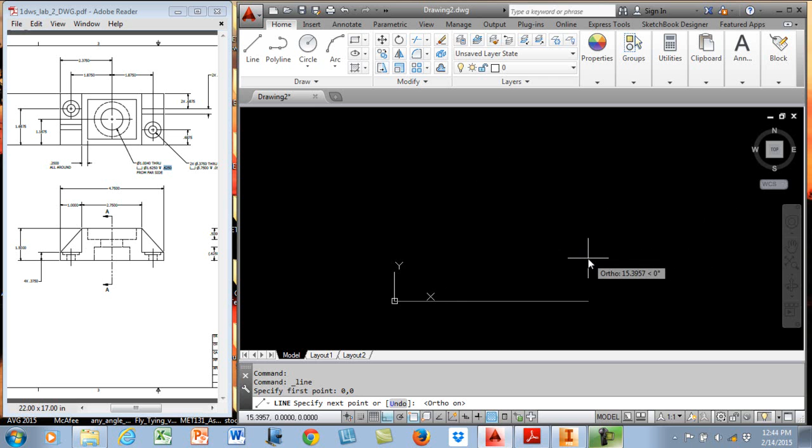And I'm going to draw one up at 0.375, which is given right here. Then I want to go over, well, I don't want to go over. I'm going to stop that, and I'm going to draw another line from, let me change my settings. I don't need quadrant and I don't need perpendicular, but I will go endpoint, center for now. Those are my standards, so I'll go in here and draw a line straight up, 0.375.

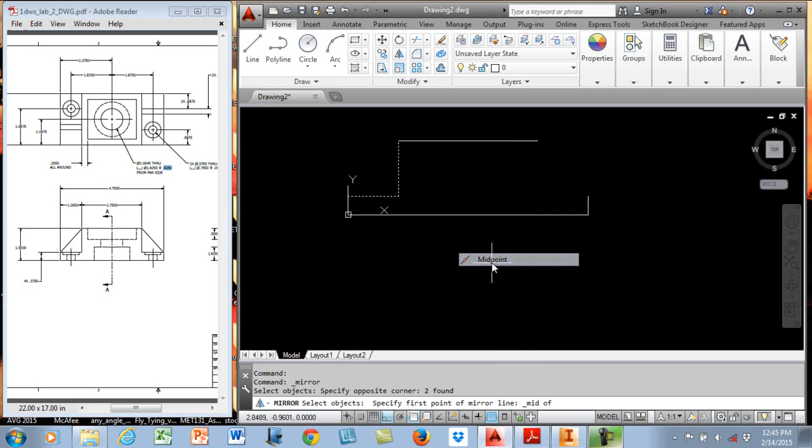Then I'm going to go over, and that wants to be 1 inch, and then I need that to go to 1, 1.5, and I need to go over 2.75, and I need to go back down. Let's see. I'm just going to mirror, the easiest way. Just mirror these two objects right here, about the midpoint here, and I've got ortho on, so I'll just click a point. Got that.

So let's look at that again. I went 4.75, which was this distance right here. I went up 3/8, which was this distance here on both sides. Then I went over and up. I said I wanted 1 in the X and 1.5 in the Y to get to this point right here. Then it said go 2.75, so since I had ortho on, all I had to do was type in that value, and it went to the right because I had it pointing to the right, and then I mirrored these two to reflect those.

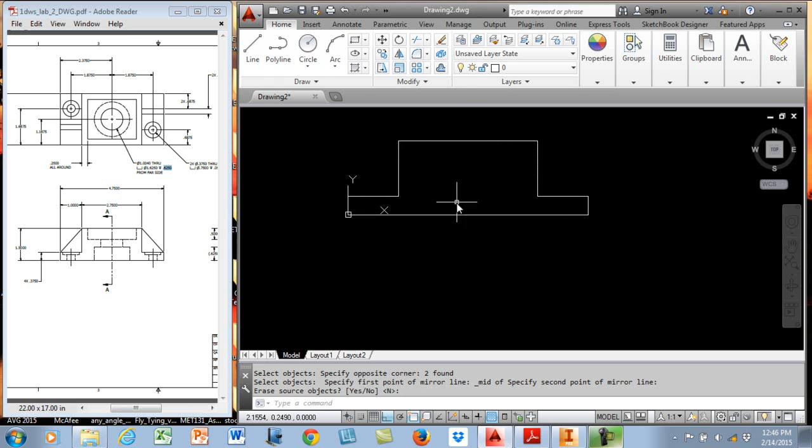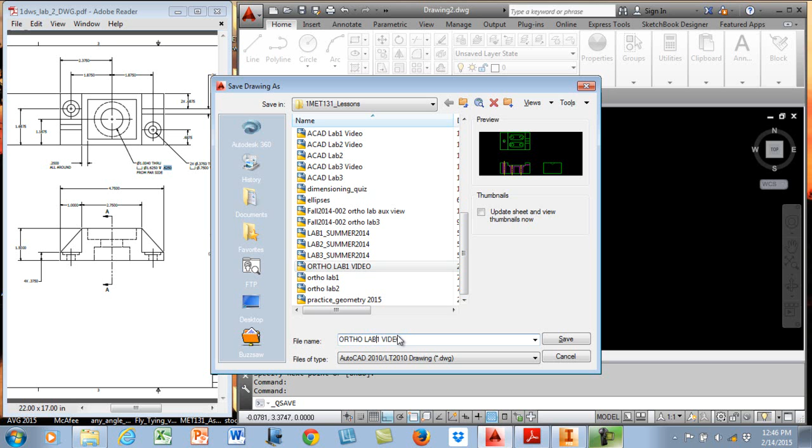And then let's go ahead and draw a line from this endpoint here to that endpoint, and from this endpoint to that endpoint, and that takes care of the two gussets. We can't draw the hidden features yet, so we'll just leave that like it is. So I need to do a save here real quick. Ortho Lab 2 video is what I want on this one. Okay, so we're done with that.

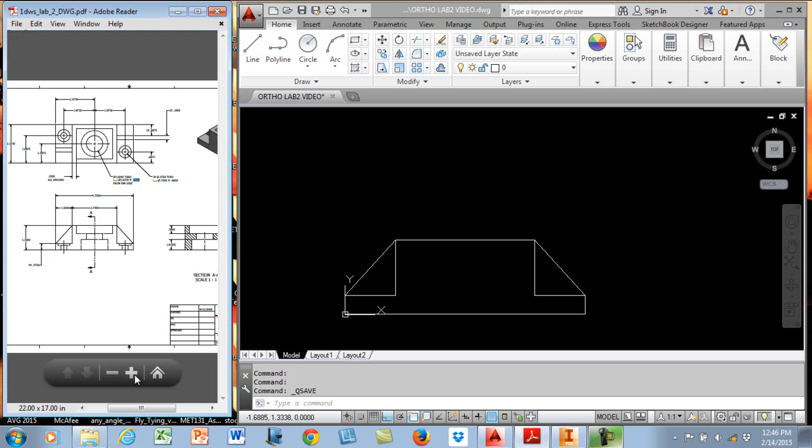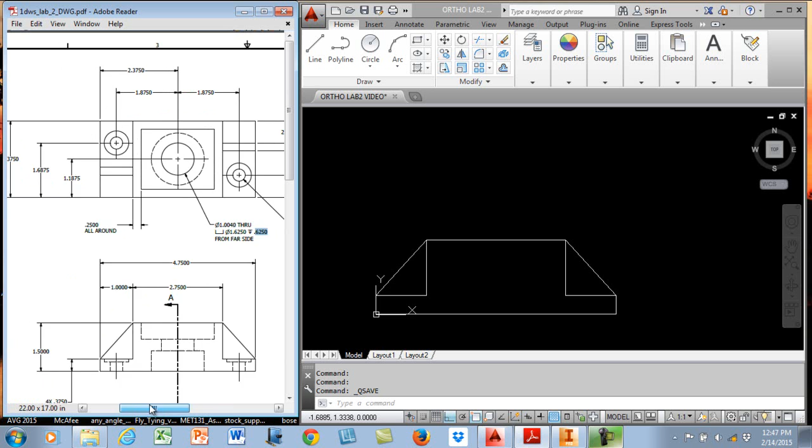So we either want to draw the top or the right side. I don't want to draw the right side yet. I'm just going to draw the top, and I need to make that a little bit smaller. If I make it too much smaller, we're not going to be able to read it. So let's make our CAD a little bit smaller. We'll make this a little bigger. Now we need to go a little bit more. See if that's enough yet. Not quite, but that'll be close enough for now. We do need to have the overall here, so we'll keep that up where we can see it. Okay, so we'll go in there and draw that now.

So again, I'm going to draw a line straight up. It doesn't much matter how long you make it. And I think this time I'm going to draw a rectangle from this, relative 4.75 wide, comma 2.375, which is that number right over here on the left. So there's my first shape of that. So we'll move that over.

Okay, now it says we need to have this box here in the middle. So I think what I'll do there is I'll draw another box. Now, the only thing about that is it does show me that I need to go over 1 inch. So I'm going to say reference from this endpoint. Let's see, I got to get my command back. Reference from the endpoint right here. Relative to that, 1, 0. Okay, there you can see it.

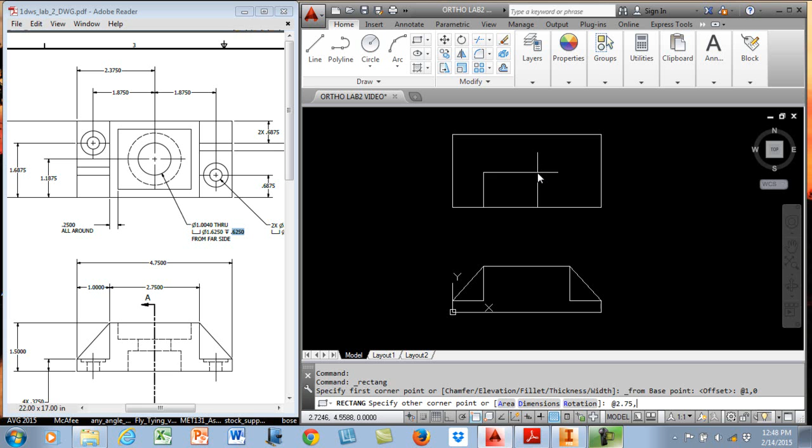Relative to that, 2.75 in the X, comma, what was this number? 2.375. Yeah, 2.375. Whoops, fat fingers. And enter. So that creates that box there.

Now, the only thing about that is I would be careful. I don't want that whole box, so I'm going to click on that and explode it. And I want to get rid of this line and that line and delete them. Okay, so you know what? Actually, I didn't want to delete that right then. I'm going to undo that, and I'm going to undo the explode. I want to keep that like that just for a minute because I need to have that offset.

So I'll offset a distance of 0.25, and I'll offset this right here inside. So that's a lot easier way to do that. Then I don't have to do any trimming. Now I'll explode this one and delete this line and that line.

Now I'm good to go there. Of course, I'd hit the save button again. I've saved, done something worth saving. Well, let's see. We can draw these two circles if you want. We could draw the 1.004.

So I'll draw a circle, and I want to go reference from the... Where do I want to go from? Well, let's see. Let's say the midpoint of this line, relative to that 0 in the X, according to the drawing, 1.1875 in the Y. And that centers that up. Then I can go to the diameter of 1.004.

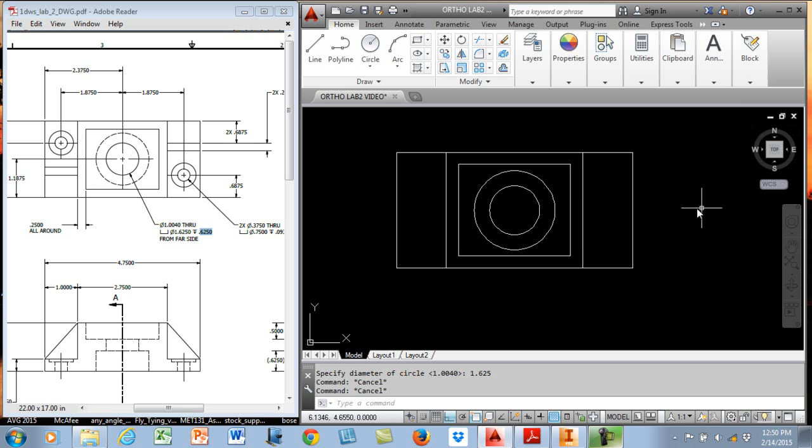Now I haven't created any of the layers yet for that, so let's make this smaller again and I can see more of my toolbars, but I don't see that here. So if I hold it there long enough, here's the one you want. It looks just like the one you see in your full screen. Layer Property Manager, I want a new layer, and I want visible.

And if we go with the colors from last time, I think we used green. We do want continuous. We want the thickness of that to be 0.7 according to the standard. And that's all we need on that one. So we'll create a new one, and we'll call it hidden. And I don't know, what did we make that? Was it magenta?

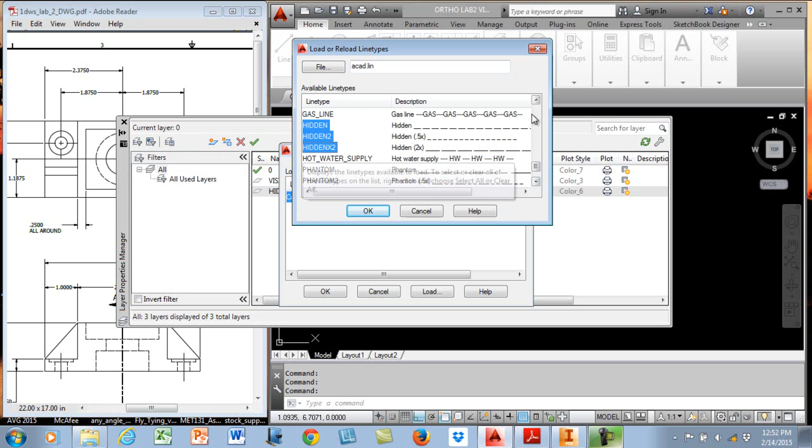We don't want continuous, so we need to load the rest of the lines here. We know we want dash, or excuse me, center line. So if we hold the control key down, we can pick multiple and skip some and get the hidden. Yeah, that'll do us. So we'll get hidden 2 on this one. We do want the line weight to be 0.5 instead of 0.7.

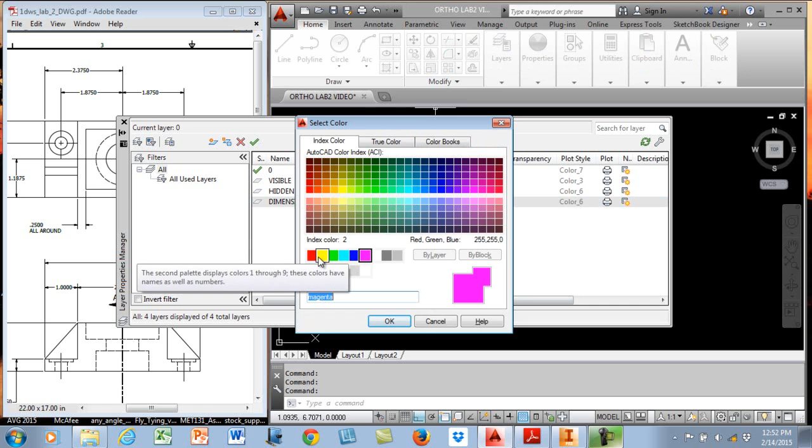We want to do another layer called dimensions. And I gotta spell it properly. And I think, what do we use on that? Let's go with yellow. Doesn't much matter. We don't want hidden. We want continuous. And the 0.5 is fine there.

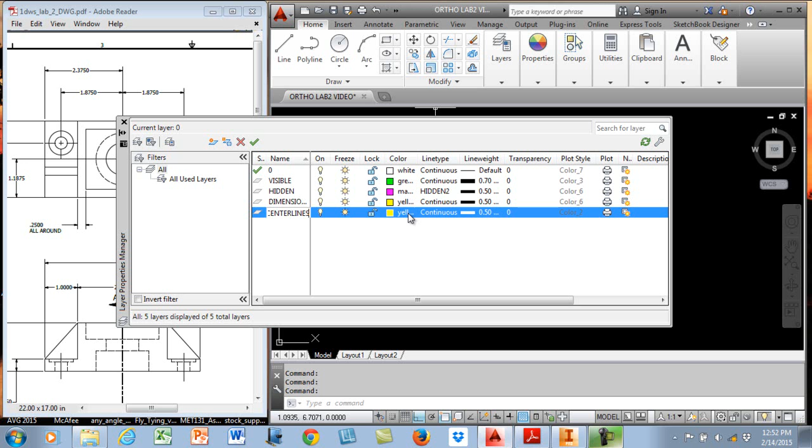That's what you want. Then on the next one, we want the center lines. We'll usually keep all those the same properties, with the exception of the continuous. We want that to be center 2. And we're done with that. Now we do want to put this on the hidden layer. Okay, so we're good there. So let's save.

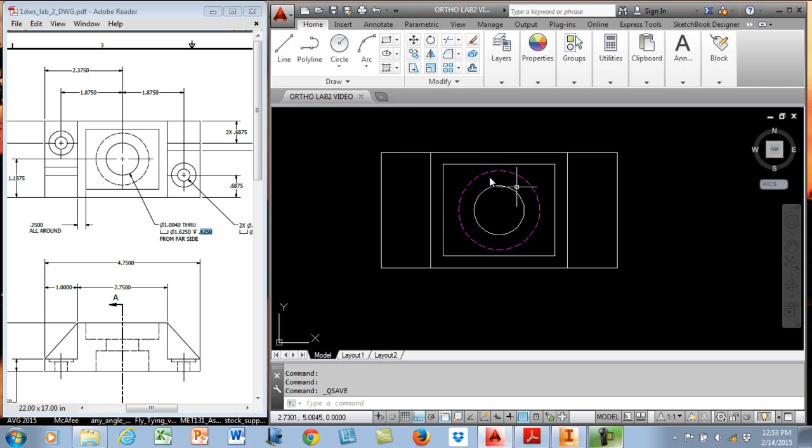Now if we want to draw these counter bores, what we want to do there is we'll draw a circle, and I need to move this over so we can see it. It looks like from this corner, actually it'd be from this midpoint, wouldn't it? We want to go up 1.6875, but first we need to go over 1.875. So we'll go in there and on our circle we'll say

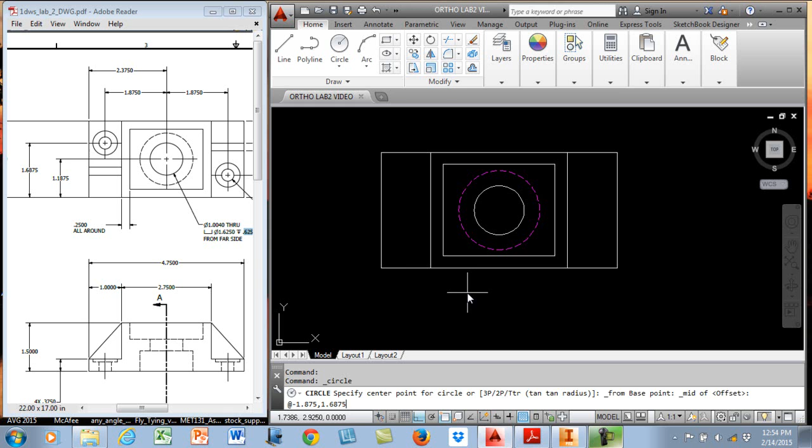at the midpoint here, whoops, sorry, I need to do reference from, sorry about that. Circle, reference from the midpoint, relative to that, minus 1.875, comma 1.6875. The diameter of one needs to be, I think it was 3/8. One of them's 3/8.

0.375. And the other one, which will snap to the center, wants to be D 0.75. Those are both solid, not hidden. Okay, and then we can also draw the rib in there, the gusset, and that's 0.6875. So let's do an offset of 0.6875.

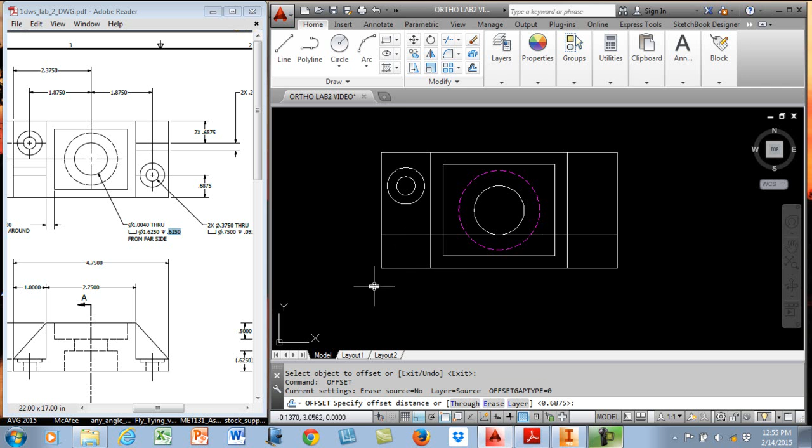This line, whoops, notice that is still one object. We need to break that up, so let's do an explode, and now they're individual. So now we'll do our 0.6875, and we'll pick this line and go up with it. We'll offset again a distance of, let's see, 0.25. 0.25, and we'll offset that line up this way, and then we'll trim to this line, both of those.

Okay, and of course we'd want to save, and then what we want to do is let's rotate that around. So let's do a polar array, all four of these objects. And the center point is at the center here. We only need two, and that's it.

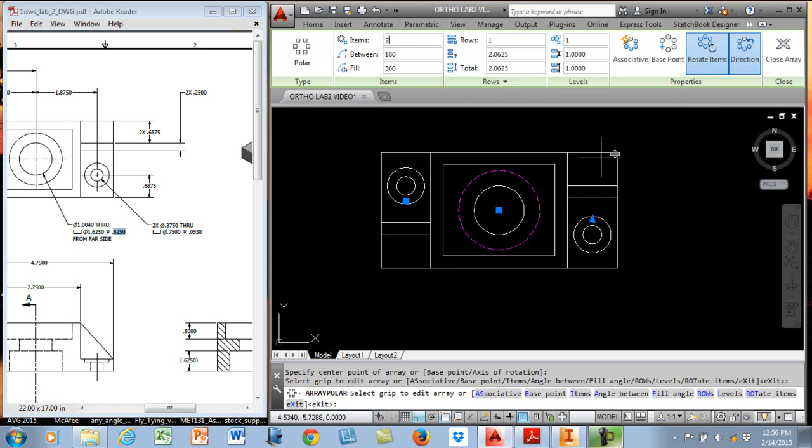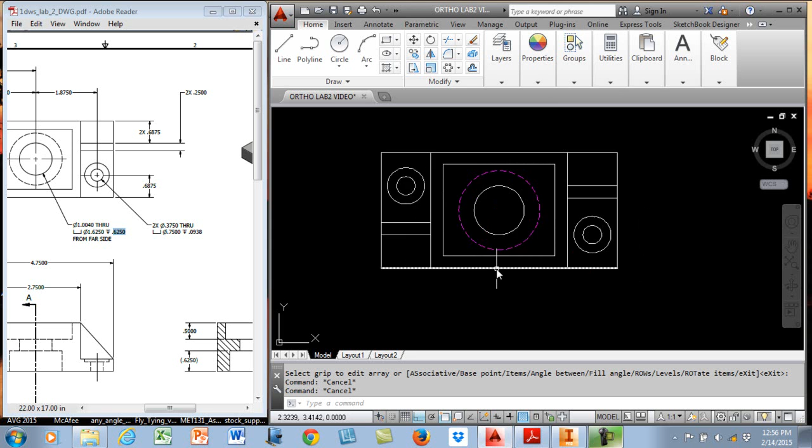No need to work extra hard to do that. You create it on one side and rotate it around and you'll be fine. You cannot do a mirror because mirror would put this at the top. So you definitely want to do a polar array on that. Okay, from there then, that view is actually done, isn't it? So we probably hit the save button again.

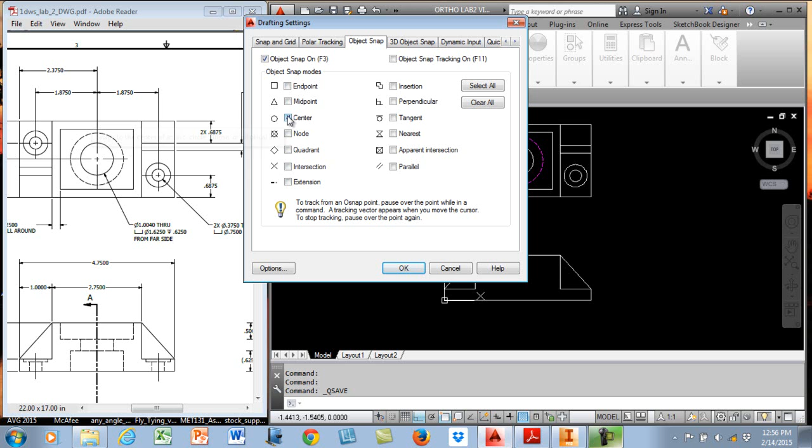Now we can project those down a little bit now, can't we? We got ortho on, but let's reset our settings here. What are we going to need? Quadrant. So we'll turn off the endpoint center, turn on the quadrant, and turn on perpendicular. And we might as well go to the hidden layer. Make that the active layer.

Draw a line from this quadrant here, perpendicular, spacebar, here to there, spacebar, and we'll go from here down to there. And again, that middle one, oops, I missed it. We didn't need this one to be that line type. We needed it to go to the center line layer. And again, I'm not going to do all those on the other side. We'll just keep it simple and we'll copy them here in a minute. So I'll trim to this line, all of those.

Now the drawing here says that the counterbore has a depth of 0.0938. So we're going to go in there and offset 0.0938, this line right here, down. And then I would suggest fillet radius 0, pick this line and this line, and this line and that line. And then I would trim to this line. Trim out both of those pieces. I also need to make sure that this gets on the hidden layer.

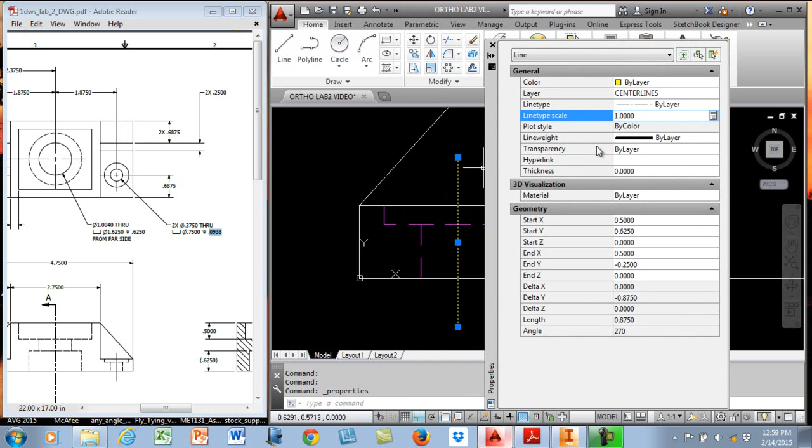And then I need to extend my center line out, so I'll do a modify lengthen, DE 0.25. So we go there and there. Now, you're not seeing the dash in that center line, so let's look at changing the line type scale. If we click on it, right click, and go to properties, here's your line type scale. It shows that as 1. We originally set this line type scale up as half of the normal, so it's actually a half, but if we change that again to a half, then it's actually going to be a quarter. So we'll hit escape, and now you can see that dash in that center line.

So we'll hit save. Now if you want to show that on the other side, we have to be careful here. If we do exactly what we did before, we'll have a little bit of an issue. If we go from this quadrant to this quadrant, it's going to actually move it down farther. The easiest way to do that, I guess, they're going to be centered on both of these pieces. So we want to copy everything that's completely in the window, and I'm going to hold the shift key down to move that out and that out.

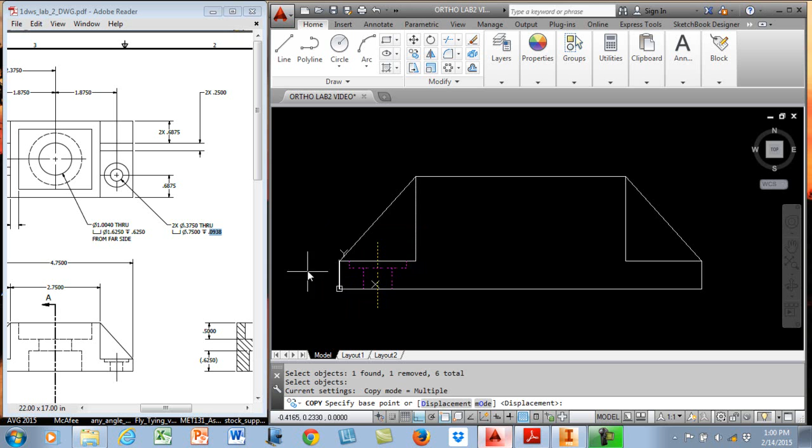Then we could just go from the end point here to the end point here. It's a relative move. You've got the same line here as you had over here. It is centered here, and you want it to be centered here, so we just move from one end to the other. We could have just as easily picked this end and moved to this end. So that's the easiest way to get those in.

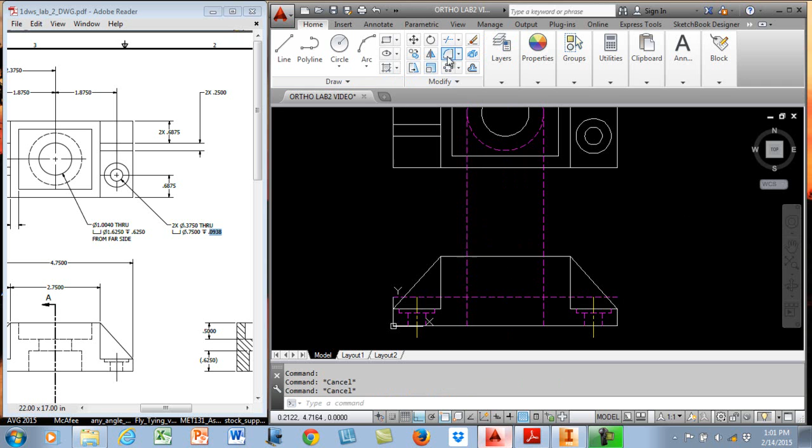Then I would draw some lines from here all the way down, and here all the way down, and this is going to construct the counterbore. On the counterbore it says it needs a depth of 0.625, so we'll type in 0.625, take this line and go up. Now we'll put that on the hidden feature layer, and then do a fillet radius 0 here and here, and there and there. That's the counterbore from the bottom side. Now if we want to get the hole, we'd go from the quadrant perpendicular.

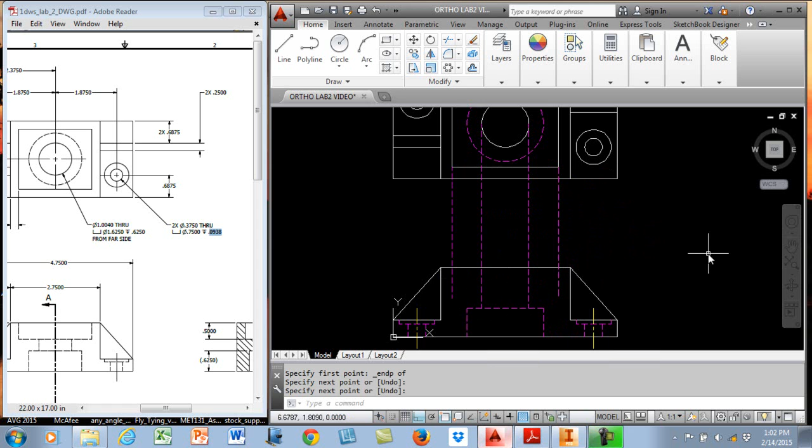Now we don't know how deep that is yet, but what we do know is if we go from this end point here, and we need another line, don't we? Well, we'll go ahead and finish these two lines up from this end point here straight down. Now then, to get that depth, we said the depth of that square is actually a ½ inch, so we'll offset 0.5. We'll offset this line down there,

and we'll click on it first and put that on the hidden layer. And we'll do our fillet radius 0 again, here and here, and here and there. Then we'll trim to this line and that line. That takes care of the rectangular shape. Now we're going to trim to these two, and that's where the hole starts and ends.

We ought to draw one more line from the quadrant perpendicular there, but we want to put that line on the center line layer. And of course we want to trim that line out to there. Actually, we don't want to trim it to there, we want to trim it to this one. That's where this feature up here is not cylindrical, it's square, so we have to stop it right there.

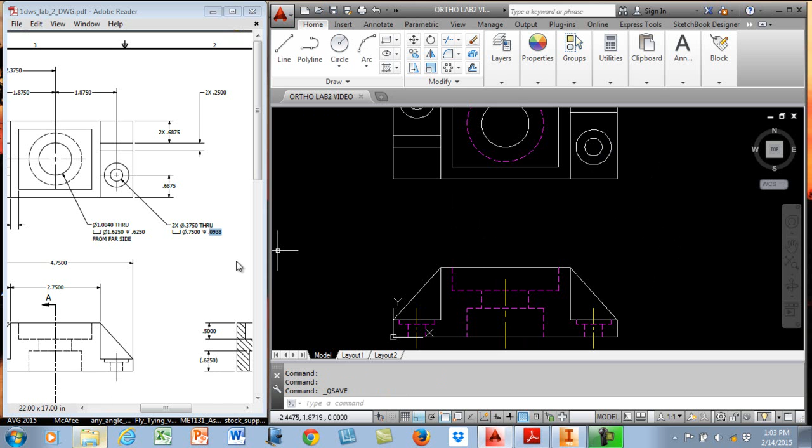We'll do a modify lengthen, delta 0.25, so we just hit enter, there, and there. And that takes care of that. Now that view is done, so we'll hit save. Okay, from there then we need to do the right side view. And that is crosshatch, but that's no big deal. We just have to get our lines in there first.

Now if you want to draw a 45-degree line, what you want to do is draw, and we'll just put that on the visible layer. Oh, and none of these are actually on the visible layer, so we've got to do some work here. Let's go in there and let's freeze the center line layer, and we'll freeze the hidden layer. And by the way, whatever layer you're on, you cannot freeze it. So I'm on the visible, and it'll give you that message saying, nope, sorry, you can't do that.

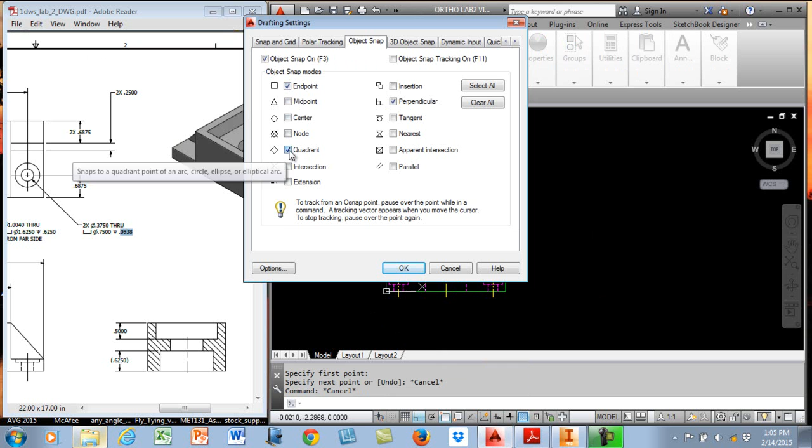So now we've got all those things frozen, so we can pick all of this and put that on the visible layer. So again, it just lets you separate things out by freezing those layers. And now they're back. And more importantly, we've got all the visible stuff on the correct layer. Well, let's see. I probably want to draw a line. Whoops. Need to change my settings. I do want endpoint back on. Quadrant would be fine, but I'm not worried about that. Let's just leave it endpoint.

So I'll draw a line from this endpoint right here straight out, and let's just make it, well, whatever. And I need to draw another line. Now this time I'm going to make it from the intersection of this line and this line right here. I can pick multiple lines for an intersection. So if I shift right click, intersection of this line right here, and notice it says extended intersection, and then this line right here. So where those two intersect, it lets me start.

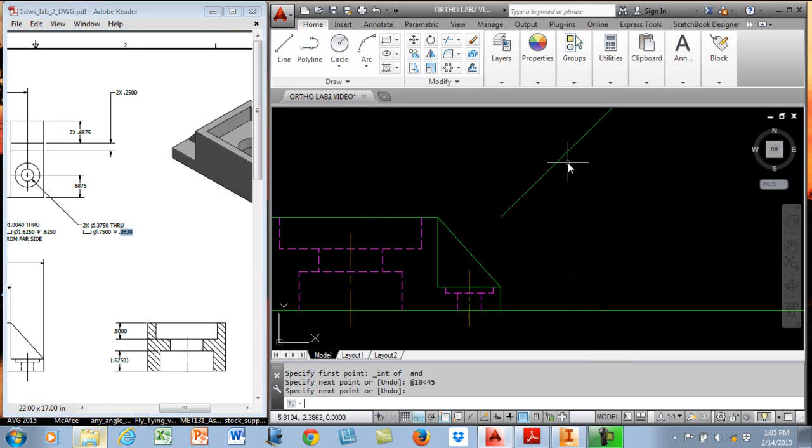Relative to that, let's go 10 angle 45. That ought to be plenty. Then I'll go from this endpoint straight over, and this endpoint straight over. I'll do a fillet radius 0 on these two. And for that matter, you could actually do fillet radius 0 on these two. Wouldn't make any difference, as long as this doesn't get moved.

Then I would go and draw a line straight down and perpendicular, and here and there. And again, you could do fillet radius 0. That'll work. Then I'd draw a line straight across. Okay, and do just a trim on this one now. So that's my basic shape. Now I need to go in there and draw some, actually there'll be solid lines, so I need to draw one from here straight across. We'll just go to the perpendicular there. They don't have to be. It can go anywhere you want.

And what I'm going to do next then is draw a line from the, oops, let's see, we don't have quadrant turned on, so we'll just click on this, come straight across, and we'll go quadrant, and we'll go from this endpoint out here, and we'll go quadrant. And to be honest with you, we could actually just create half of it and mirror the other half, couldn't we? Why don't we do that?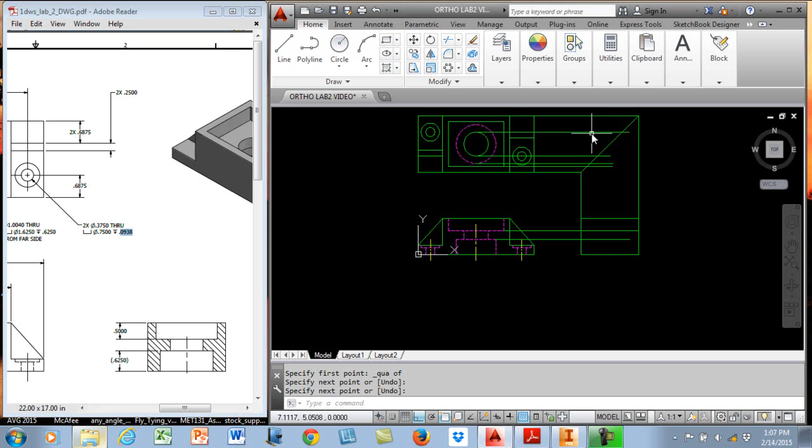So I'll go in there and let's zoom in on that a little bit. Trim to this. We'll trim these three and draw a line straight down. Now that one's going to be perpendicular there. This one's going to be perpendicular all the way down. This one's going to be perpendicular to there. So let's see.

And let's do some fillet radius 0s here and there. Here and there. So it's starting to come together, and we'll trim to that line out, and we'll trim to this line, and that line, and that line for that matter. Of course, we'd want to hit save.

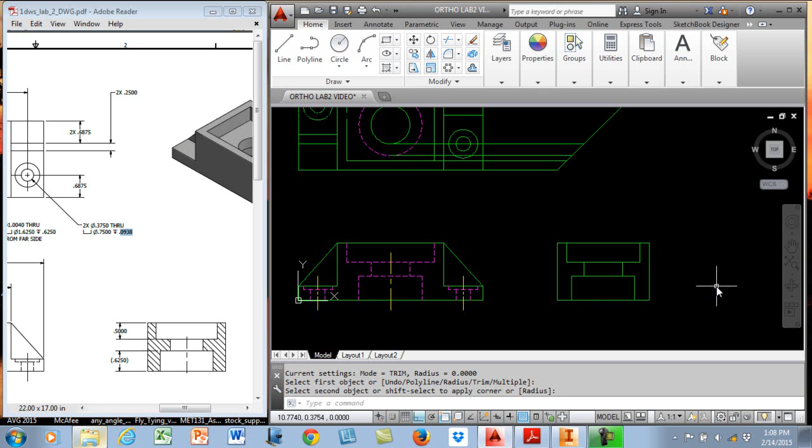And maybe do a mirror now, and we just want to mirror this, this, and that. Don't get these lines or you have doubles. And we want to mirror about the midpoint here, straight down, boom. Then we're going to do a fillet radius 0 between this and this, and this and that, because we didn't know if they were the right length or not. And we're still at one line here, one line there.

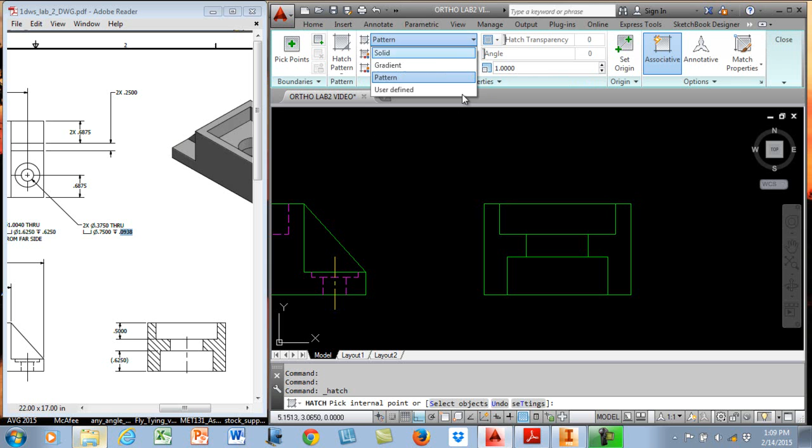And then, as I showed you in class the other day, possibly, maybe I didn't, but I'm going to hit save first. Crosshatch pattern is in the draw, and there's our crosshatch. Now it'll come up. Here's your different patterns and such you can put in there. I'm going to explode this out here, make it a little bigger. So you can do solid, you can do angled.

ANSI 31 is a generic mechanical properties type crosshatch pattern, but note there are other patterns out there that you can use, so we can scroll through them. And I think if we hit, there you go. So we can see different ones. Some of them will be concrete, bricks, sand. There's all kinds of different stuff. There's a parquet floor and these are mostly for construction type things.

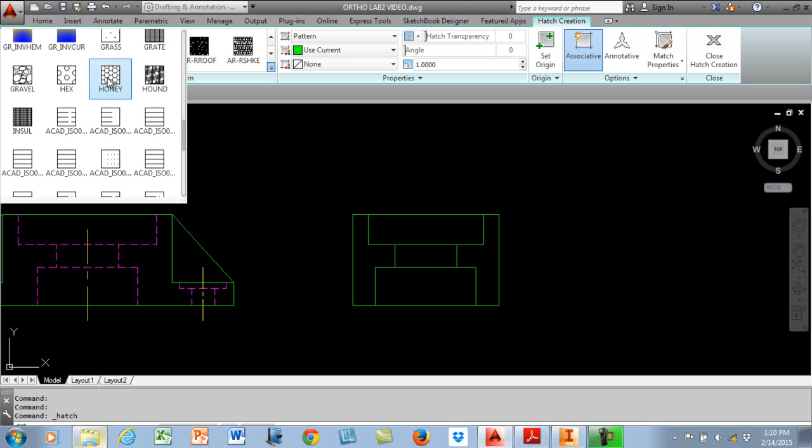I think there was a brass, maybe. Yeah, there's brass. And different types of patterns there. A hexagon, if you had some kind of a metal, there's a grating. But again, typically we use the ANSI 31. Okay, and note when you put this in, it's at 45 degrees. If you change the angle here, this will change the angle from 45. Let's say if you put in 15, it would now be a 60-degree angle.

This sets up the spacing, and it's just a scale factor. And I'll show you that here in a second after I get it put in. We can edit that to whatever our needs are. Now you can pick points, but normally we just pick the boundaries, and select is going to take care of that for us. It is associative, so if this changes, it'll all change. So notice it grabs whatever region, if you will, that you pick.

So I'll pick this one and close the hatch creation block. Now that's nothing like what it shows in your drawing, but if I double click it, note we can make changes now. I can change this up here, and maybe I want that to be minus 15. Okay, that's not quite really what we want, but let's double click that, and let's see, what would that be?

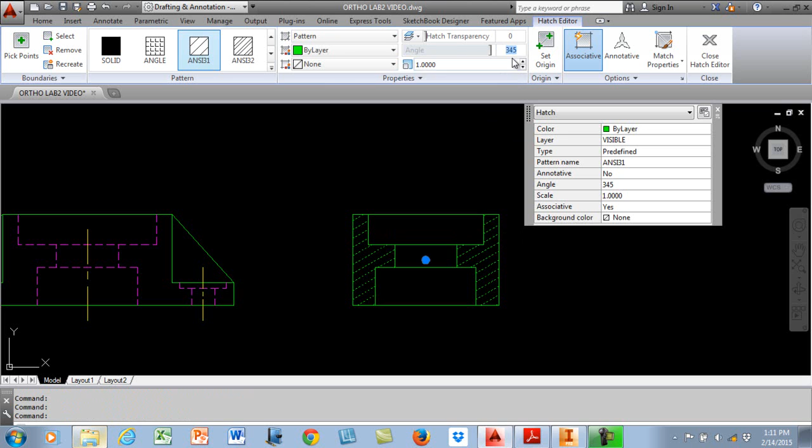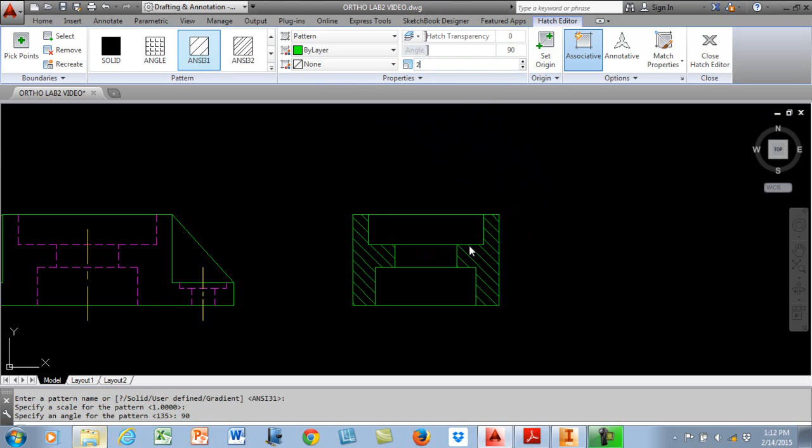I'm thinking that's going to be 135. Nope. Oh, duh. 45 plus 90 would be that, wouldn't it? So maybe it's going to be 90. There you go. It's 45 plus 45. And then the spacing, if we change that, let's say we changed it to 2. You can see it's twice as big as it was before.

Or if we made it 0.5, it's even smaller. Okay, so that would be too busy there. We don't want it to be like that. I think the 1 was probably the best selection there. So that's what you can do with the crosshatch pattern. Now we're left with we need a center line over here. Oh, and we can probably get rid of some of these. It looks like we can get rid of all of them at this point.

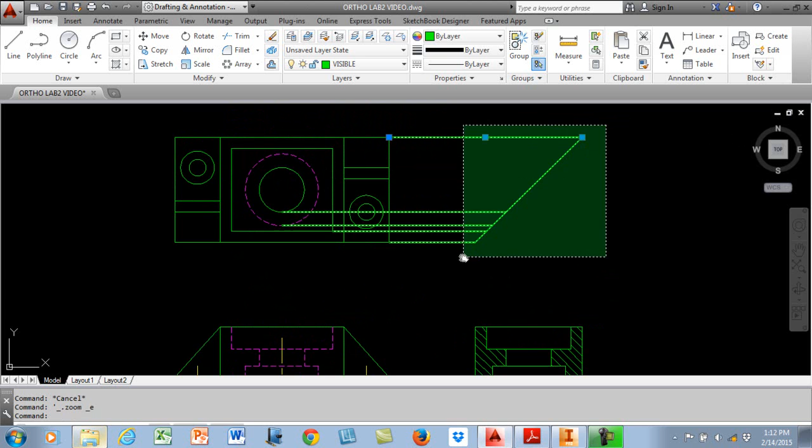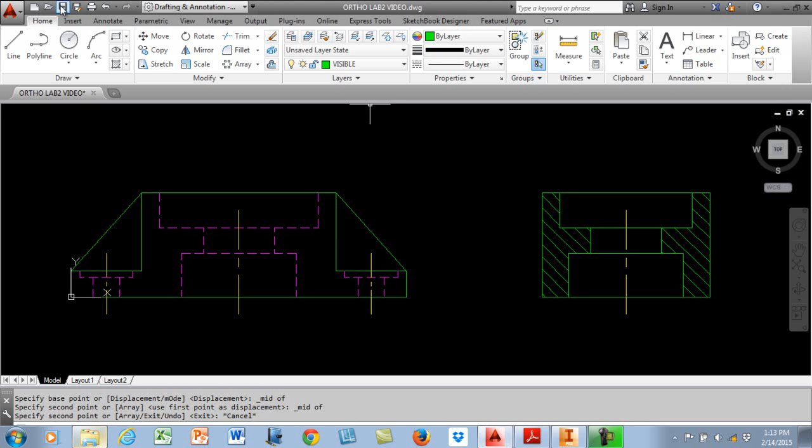Okay, so again, if I want to do a center line, rather than creating a new center line, I'm just going to copy this center line, from the midpoint of this to the midpoint of this. And that looks just fine. Again, the bottom part and this piece right here are cylindrical, so that's where your center line has to go. Doesn't go through the top. So I hit the save button. And I guess that's it for all the different features of this piece. So that's how you would create these.